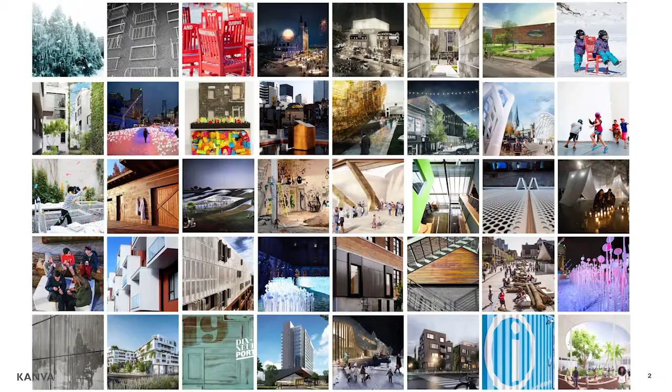KANVA, founded about 15 years ago, is a practice that merges art and architecture, building ephemeral and permanent structures, trying to reveal stories and narratives using certain innovative technologies.

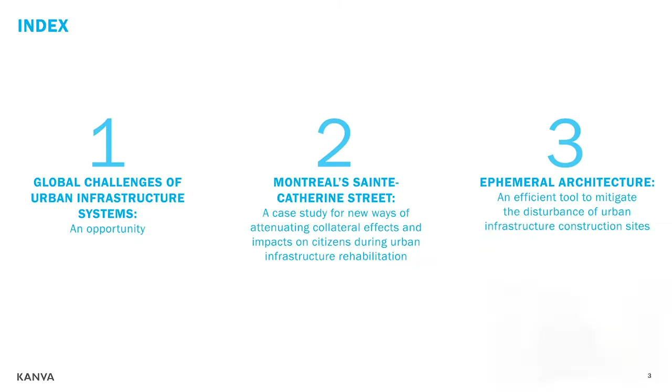The presentation today is based in three parts. The first is to reveal and talk a bit about the challenges of urban infrastructure systems. Then we jump into a case study in Montreal, Sainte-Catherine Street, of how we try to address it differently. Finally, in the third part, an open-ended question on these experimental projects: how do they remain pertinent in the urban ecosystem?

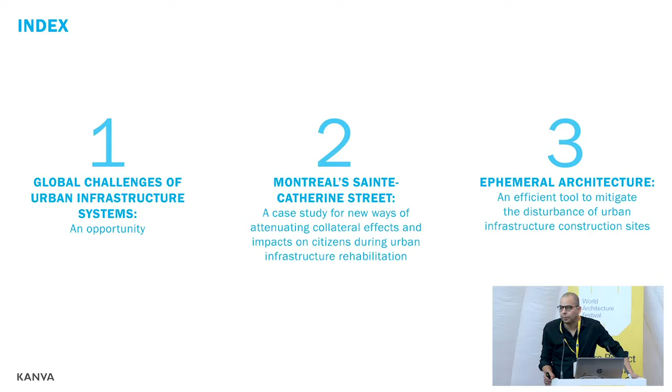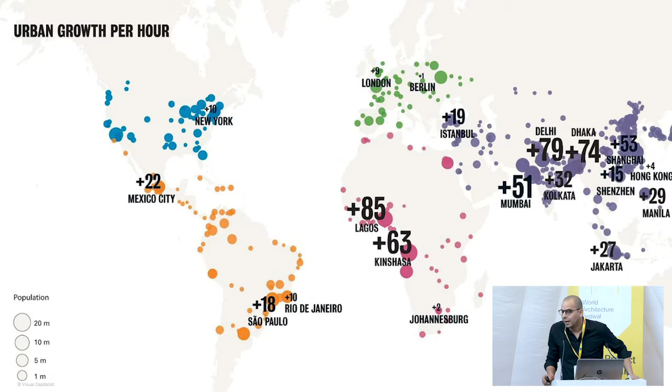So if we start with the first part, challenges in urban infrastructure systems: there is a very delicate balance right now, a challenge in how growth within our cities is evolving so rapidly, and how our infrastructures are trying to cope with this and maintain that balance.

What happens is we actually have, below ground, a network which is often outdated with deferred maintenance and past its lifespan. We need to replace them. Common to many cities, when we replace them we end up with major struggles, humongous construction sites in the middle of the city that last for a long time.

These result in a variety of negative impacts, from interruption of services. We often have accessibility and circulation as a problem, and all sorts of disturbance in terms of noise, smell, sound, etc. And from this stems economic, social, and political problems.

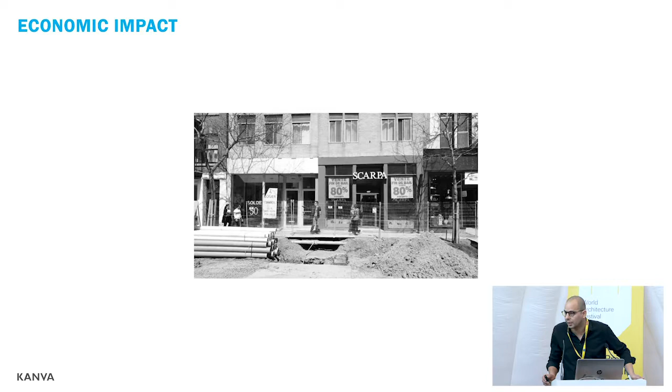There are businesses that start closing. In Montreal, we had several important streets that lost almost 30% of their commercial spaces. And it starts a sort of protest, a form of frustration from the public, which obviously lands into the offices of politics and city deciders.

So there's a decision to be made, which is often a challenge because political mandates are shorter in time than the duration of construction sites in the street. But instead of just depending on tax breaks, financial compensations, signage, and so forth, there's perhaps a different way of addressing construction sites. This brings us to the second part, a case study in Montreal on Sainte-Catherine Street.

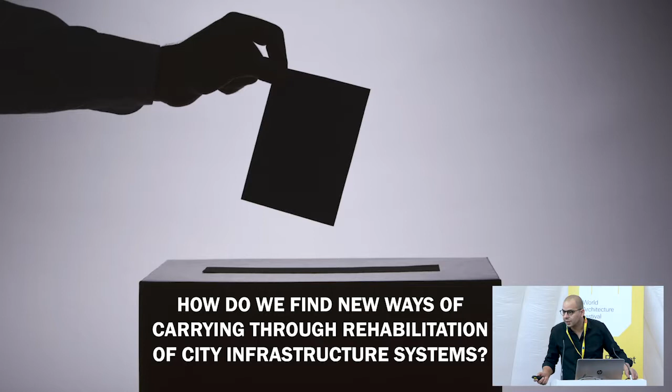Sainte-Catherine Street is perhaps the most important commercial artery in Canada. It's a hub both for business, tourism, schools, universities, etc., and it has a very historical character.

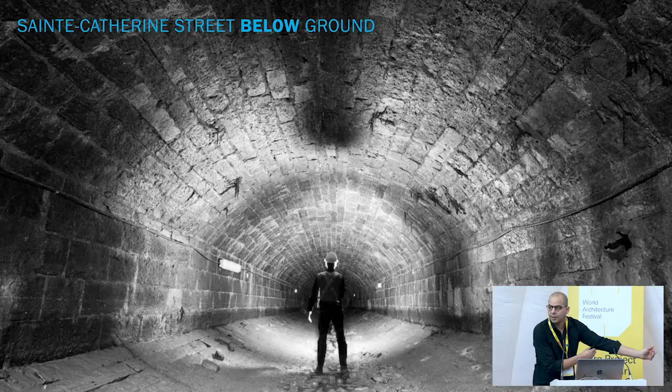But below Sainte-Catherine Street, we have major problems, and it's running out of time to fix up its underground. As a matter of fact, there are so many conduits leaking within the city that right now we're seeing a great waste of resources and natural energy.

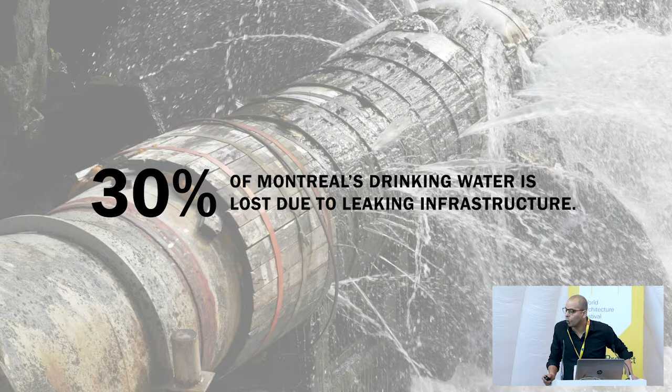To address this, the metropolis decided that for 8 years and over 19 blocks, it was going to open up the street and refit it. And of course this brought great fear of how do we address, how do we change, what do we do to prevent a catastrophe on this main artery.

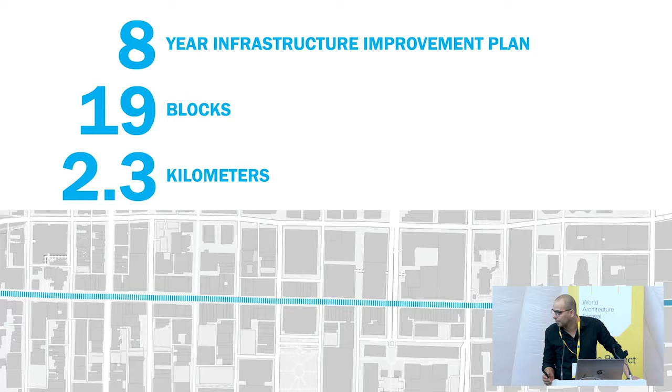So the city came up with this competition called Vivre le Chantier Sainte-Cath, which means to live the Sainte-Catherine Street construction site. There are 6 objectives, but basically what they're trying to do is mitigate the impacts, celebrate the new street, and find ways of securing economic stability.

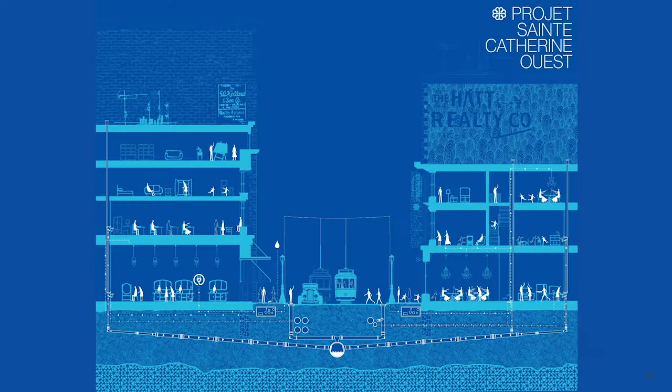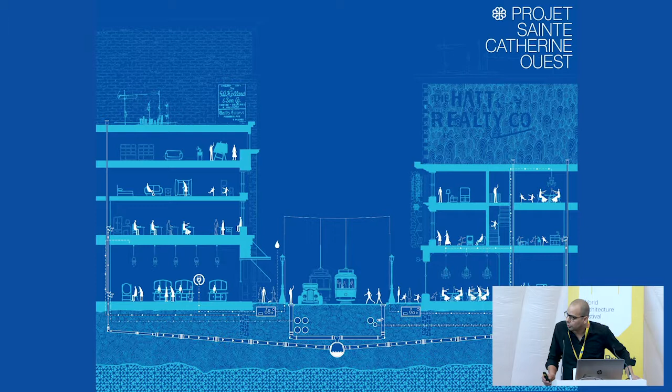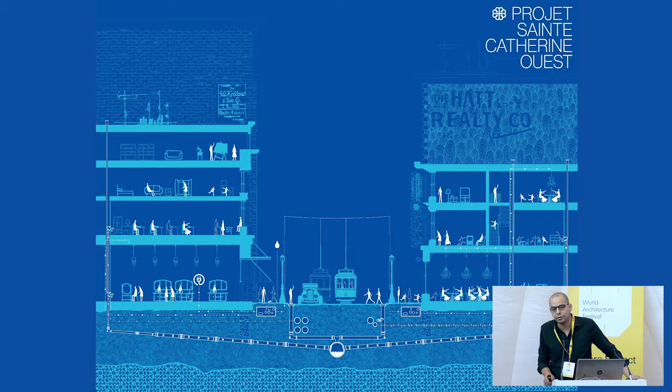This is the first drawing we drew during the competition phase. In the street section we're trying to link the above ground and the below ground, to show that our daily lives are directly linked to what's happening below ground - this interconnectivity between both. Our cities are living entities, and they continuously change and evolve depending on different scales of time.

But this is not only true above ground, it's also true underground. It's a whole living system that allows us to live above ground. When we looked at this competition, our architectural intention was to build and propose something dynamic, that would accompany the transformation of the street and be as alive with the city as the proposal could attend.

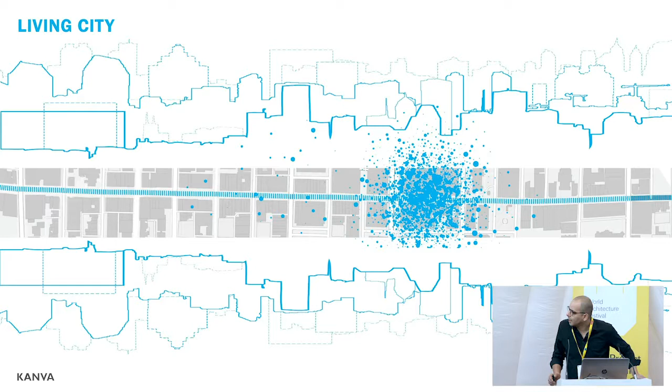So we turned to nature and started studying different cycles, all the way from embryonic states to final stages. The word Imago is actually the last stage of a butterfly's cycle.

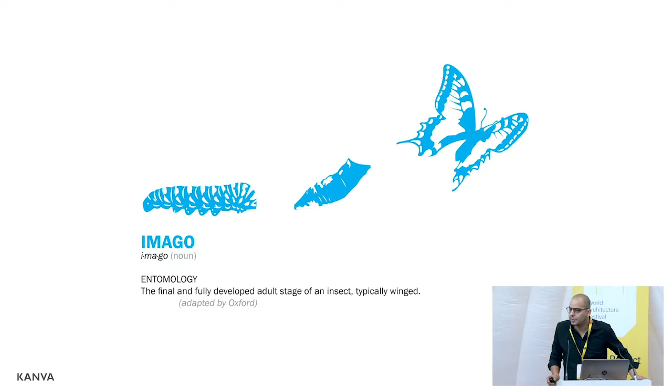And so these biomorphic, inflatable, pneumatic architecture structures accompany - they go along the street and shelter and protect the pedestrians. They become a way of articulating the transformation of the city and celebrating its transformation.

When you look at a wing, it's very delicate membranes, but through their configuration, they have an efficient structural system. We tried to inspire ourselves from this to design a structural system that could be efficient and deploy itself throughout the site.

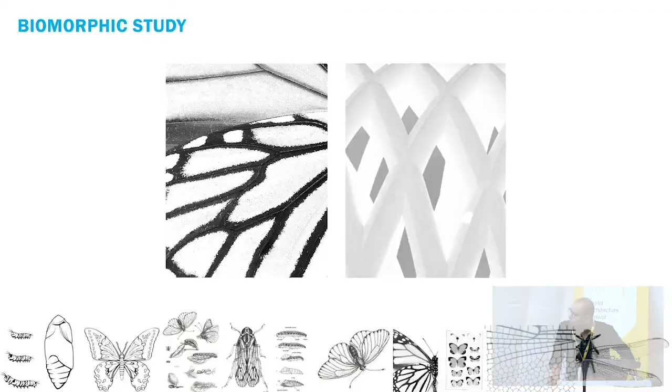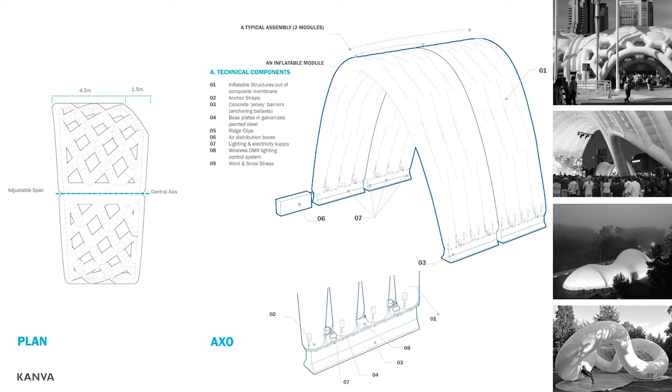Imago is basically composed of three parts. At the base, you have a concrete jersey, very similar to what's used to maintain vehicular control. Above, you have a high-strength polycomposite textile that's inflated. And between the two is a plate, which holds all sorts of lighting fixtures, as well as the air supplies for the inflatable structures and control systems for active management of air pressure and lighting performance.

The first 3 meters are heavier gauge, as they're interacting directly with the public and need to be overly protected. As we go up, there are openings, which try to decrease the resistance to rain, wind, and snow loads.

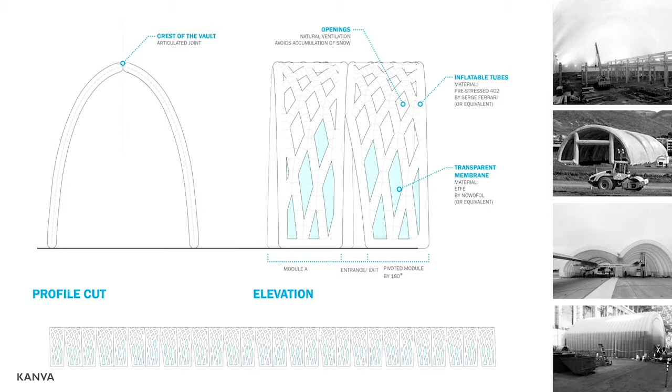At the top, at the crest of the vault, we have a hinge that creates a pinch. This pinch allows the Imago's span to vary—from a wide span of almost 12.5 meters, about 3 floors in height, to a narrow span of 9.5 meters.

So not only is it easy to move along the site, it can also change its configuration to adapt to the width. And since it's composed mainly of air, it's able to expand and occupy the site to the scale of the street.

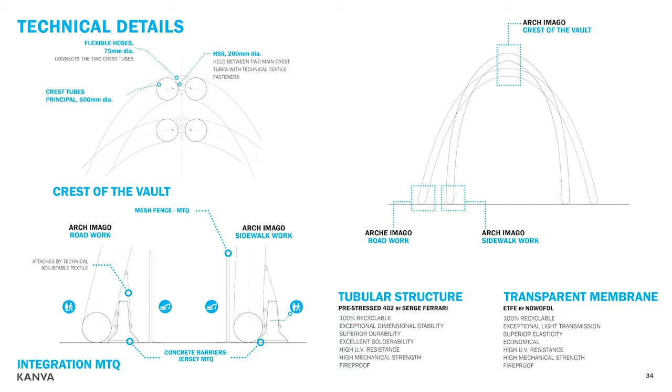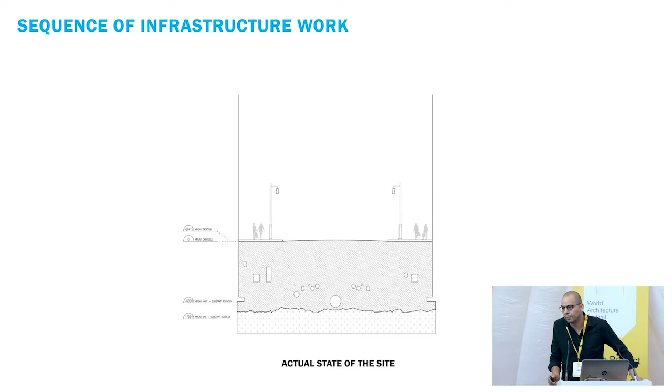This is a typical sequence that would happen on a street as construction evolves. This is Sainte-Catherine Street—piles come and get planted, and immediately, in the wide span configuration, Imago comes to the edge of the sidewalks, allowing excavation to happen below while shielding the public walking along the sidewalks.

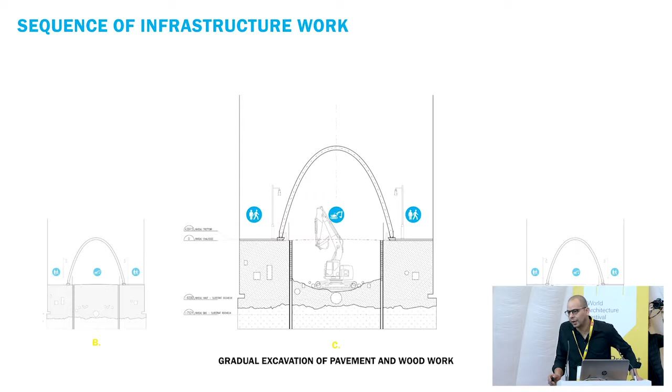After excavation, we replace the infrastructure systems, backfill, and follow with preliminary paving. This allows us to transfer and change the span—we drop to a narrow span, allowing the work to be occupied on the sidewalk while the public starts circulating in the center of the street.

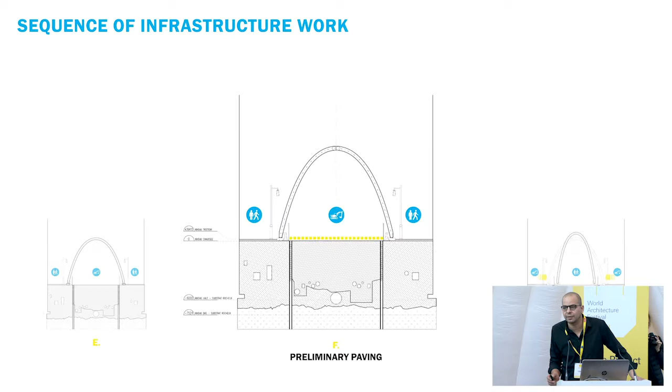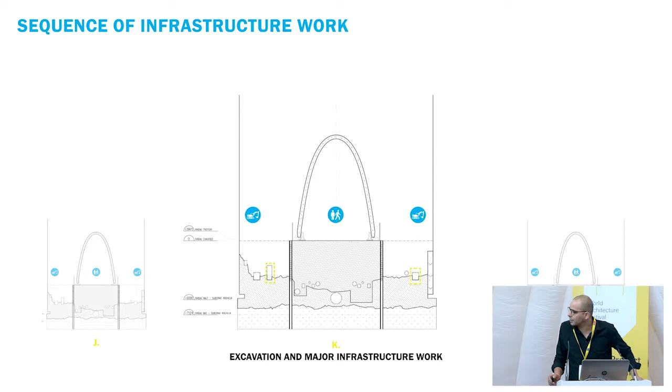Excavation continues on the sides, with replacements as necessary, followed by backfill, and finally preliminary paving again. We can then fully remove the inflatable structure, remove the piles, pave, and complete the cycle. So at times, Imago is a shelter, a gathering space.

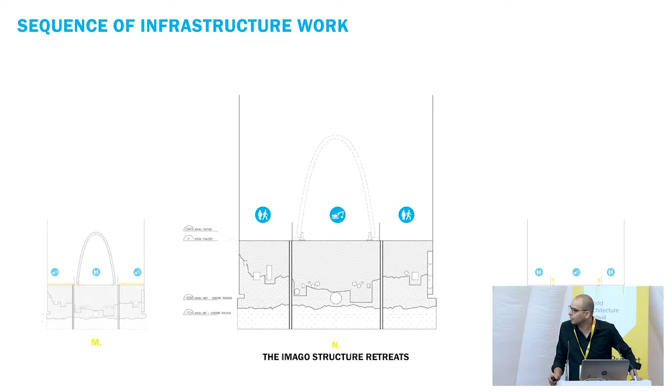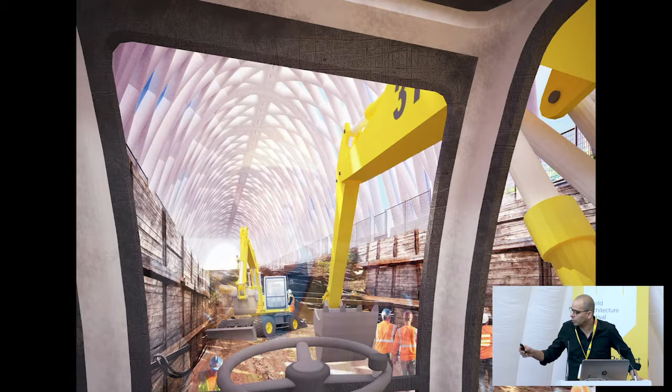It's available to the public as a new way of inhabiting the city. At times it shelters a construction site, which imposes strict studies in terms of machinery, ventilation, lighting, and so forth, to create a division both visual and psychological. The module itself is quite simple.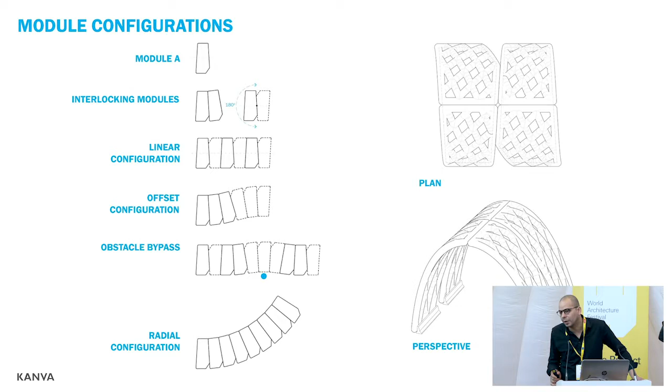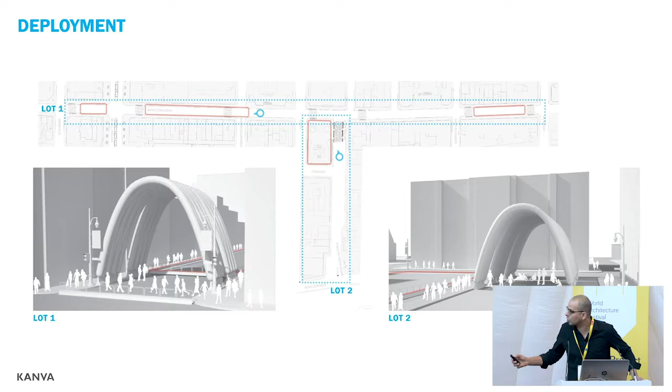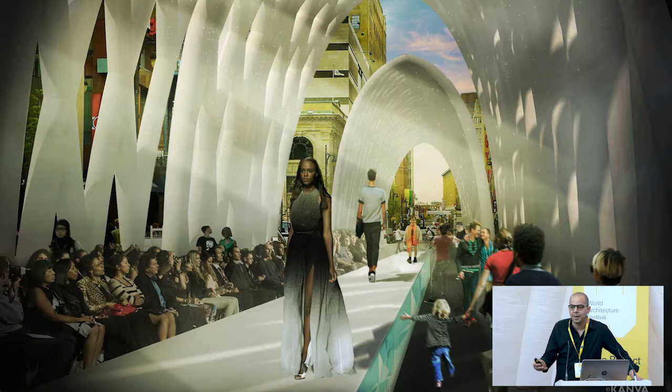On the right, interestingly, as the street is transformed, so are the public places. As we remove these public spaces, which are important to the community and the city, we must offer citizens a new public space. So Imago becomes a shelter, a place where different programming can occur, offering public space to citizens. With integrated lighting at its base and great potential for projection, it all of a sudden becomes an event.

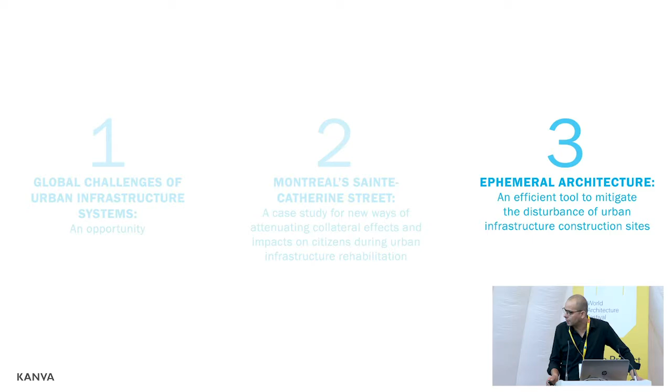And so that sort of summarizes the second part, the case study, after having seen the infrastructures. And now we wonder what is the second life within this urban ecosystem of these installations. I believe infrastructures will just continue to grow and grow. Construction sites will always occupy our streets in the city.

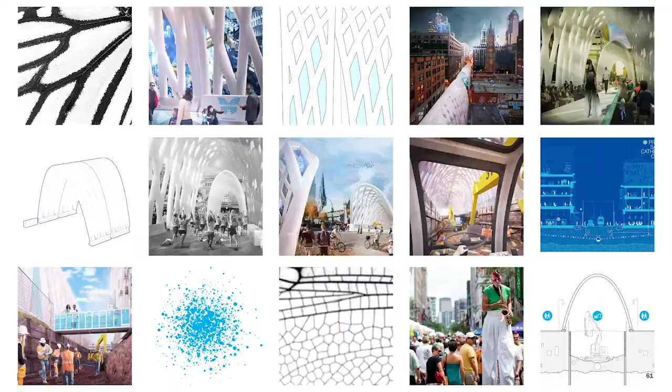And so the way Imago addressed it was to simply establish a dialogue and decide to accompany the construction site, and be part of this transformation. Inspired by nature, what it simply did is place itself between the city and construction. And as this construction site comes to an end, others will occur, and other design solutions will come and inhabit the city.

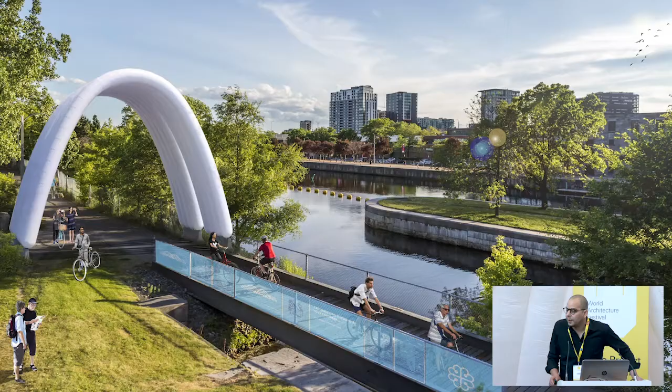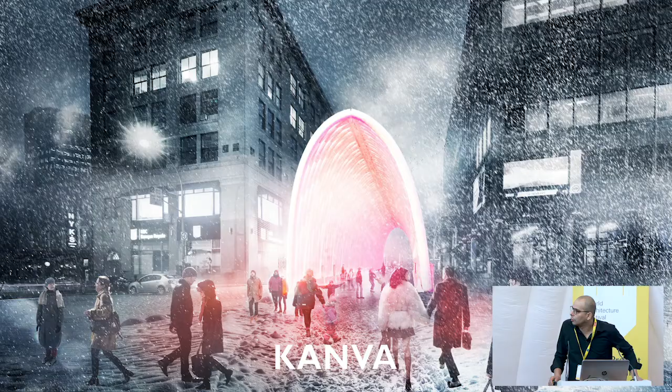And perhaps it's an opportunity for Imago, this nomadic architecture, to keep its journey, to keep going along the street, along the city, whether in public markets, being present at different events, or being along different bike paths. The point is that by maintaining it active within the city, what we're trying to do is remind people of our connection to below ground, and have the opportunity of this nomadic simple gesture to somewhat be an elegant icon within the city itself.

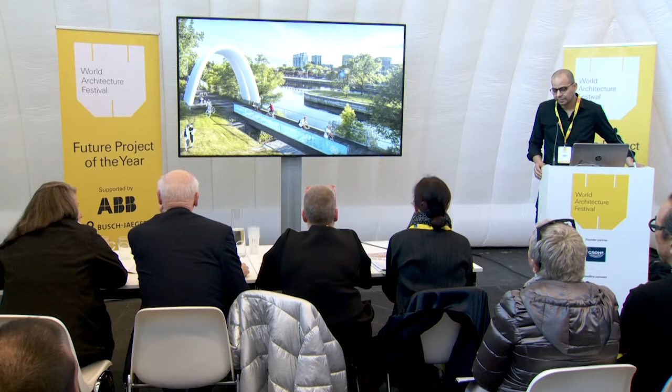I'm assuming that St. Catherine's Street is a pedestrian precinct. It isn't. Okay, I wasn't then quite clear about how you deal with traffic. The city is actually removing traffic from the street. It's using all the side streets, but the only thing we need to respect is that setting up the installation is dependent on what's happening with the construction work.

The first reflex of the city was to say we're going to get everybody off the street, block per block, go around, and make sure we can actually follow through with vehicular and emergency access. Emergency vehicles must continue, okay? But then as people started to go, they tried to establish whether they could work 24 hours around and start splitting the street in half, and so forth.

And so since there we're not sure, that's where the discussions for the hinge arrived, to try and see - well, since you're not going to be able to decide and you have to react to existing conditions, then we need to be able to adapt to you.

Okay, could I ask another question? Environmental protection - how much environmental protection does it give you, particularly in the winter? It will not cover from the snow. No, I think what we learned quickly when designing it with the structural engineers Blackwell is that the more we try and make this a closed, fully shielded entity, the more it will fly away. And we can tie it to 6-7 concrete jerseys, it'll just leave with the whole thing.

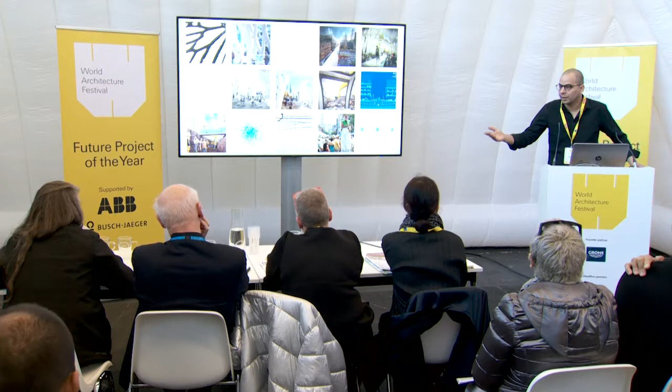So it's actually not just being put aside - what they want to design on the street is now being revised. I think they want it more pedestrian, more bike paths, and so forth. And I think when it comes back up, then we'll have that discussion with the city.

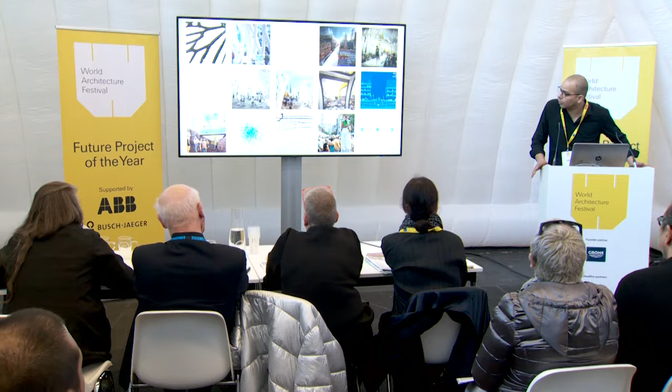How do we go forward? Discussions have occurred about whether it can be placed before construction, or placed somewhere else. One idea: there are 19 boroughs in Montreal. Is it possible to place it on the street where part of the work has begun, then when construction is intense, have it leave the site and move to remind the 19 boroughs of its main street, then come back?

I just want to ask a technical question - so it's inflatable? Yes. So you can deflate it, package it, and move it? Yes. Actually, the criteria we had from the fire department was to inflate or deflate within 5 minutes.

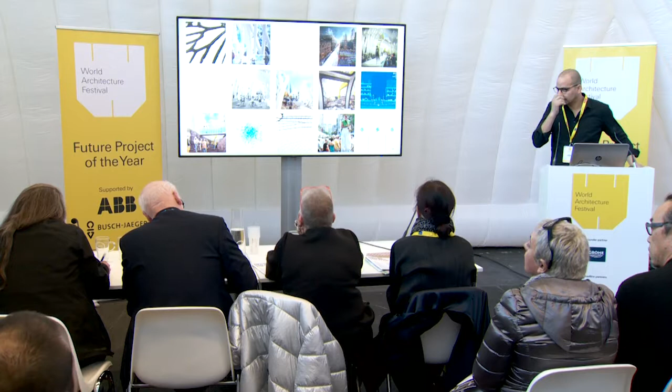It reminds me of two great figures of the past, Cedric Price and Corbusier, both preoccupied with the underground street. Ellis Hillman, a friend of Cedric's, wrote a book, London Under London, and you're quite right, it's complex down there, but it's messy - we always dig holes, then fill them up again, then dig them again. This doesn't solve that problem.

We've still got to dig the holes, get down there, get messy, and fill it up again. So it's really about easing the transition over the repair process. A generation is going to be taxed in terms of their time, inconvenience, and money to provide better for the future, and this is going to ease that process. I'm looking at it as a beautiful device to ease that process.

It begs a couple of questions to me - snow and rain. There's also noise, another terrible problem with the digging and banging. So noise isn't going to be helped here at all. Perhaps a comment on the extent of the suffering reduction, and why can't we look at noise as well?

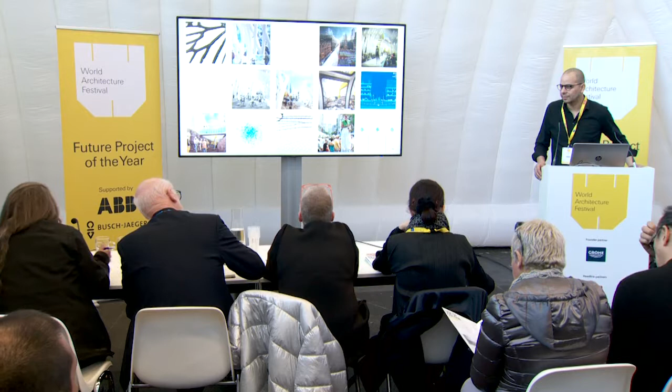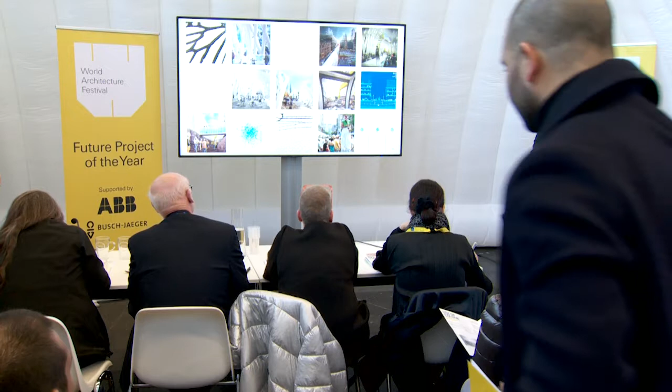I suppose it's just too difficult. I think what we tried to do on the first 3 meters is try to have some form of a greater barrier. Are we going to solve noise? No. Noise is a big problem on construction sites in the city, as you're hearing the hammering, especially when they start digging up and so forth. Attenuating sound, however, yes, it would be an interesting thing to study on its own - an interesting challenge to take on.

Cedric did a project exactly on that called McAppy - yeah, and he looked at noise as well. But it's very interesting, I'm fascinated by what you do and the way an architect's mind works when he gets stuck into a problem like this. Yes, I think it's a fascinating project, and I know Montreal because I have relatives there.

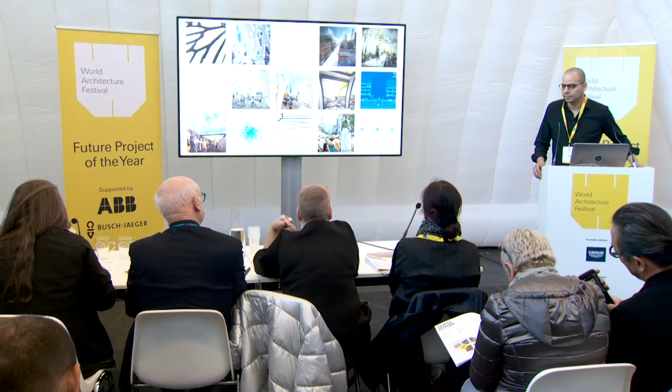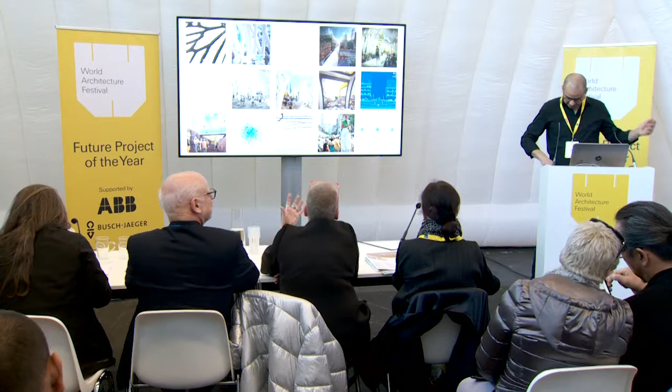Not to get too prosaic about it, but Paul's mentioned noise and construction sites - they're also dirty, and this is a delightfully pristine white structure. I presume it's easy to clean, because there's nothing worse than something grubby getting grubbier and grubbier over time.

It's funny you said it, because when we put together the bid documents for the general contractors - both the ones moving it and the ones performing the construction work - every time we asked at different stages, when it'd be moved, it'd be cleaned. So it is easily cleanable. It's also been tested to see how it reacts to graffiti, drawings, and any form of vandalism. The city required that different pieces be tested - we tried to rip them up, break them, tear them, to show that it can hold.

So if someone comes at it with a knife because they get drunk one evening, it'll survive? Technically, the first 3 meters will survive a drunken or non-drunken person who wishes to perform a violent activity on the object. And believe it or not, the greatest fear the security department had was what if somebody on the 3rd floor of a building decides to jump onto it and see if it bounces? So they established a minimum distance from facades.

It's quite interesting, the world of vandalism. Makes you think about things in a completely different way. Yeah, it's quite remarkable that we actually cohabitate. But that's another thing, okay.